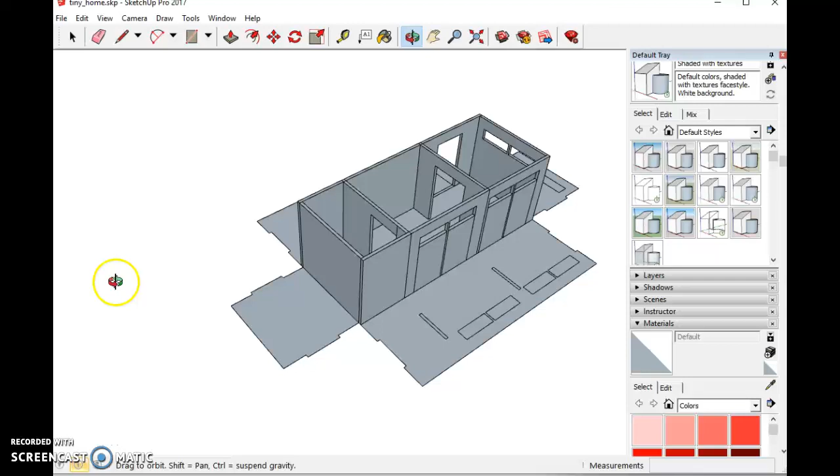Okay, now that we have all the exterior walls drawn - the back wall laid out, side wall laid out, front wall, and the other left side. Front, right, left, back wall.

Now comes the inside walls. There's no easy way to do this besides having to rebuild it again flat. Because basically here we're drawing these - if you're given a sheet of cardboard, a ruler, and a pencil, and asked to draw out the shape of the wall and then cut it, that's what we're doing. We're drawing the shape of the wall on some flat cardboard.

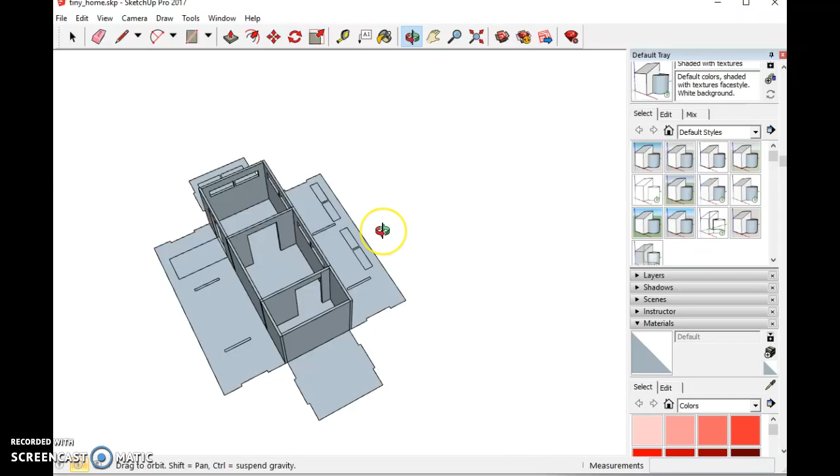What would be the simplest way to explain this? Let's just see what happens here. I'm going to try a step - try to find a camera angle that can see a majority of my lines. The left edge, bottom edge, right, they're all there.

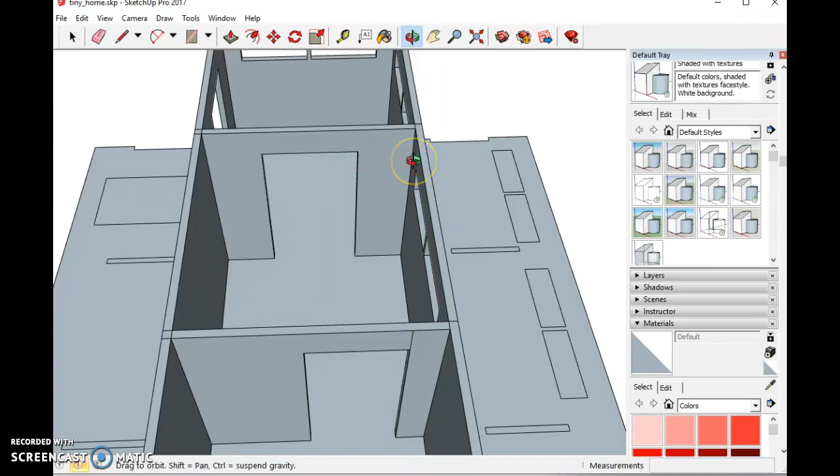I'm just going to kind of pull a tape measure on this. I'm going to go to Tools, Dimensions. So from the corner, this point, I measured that. I'm going to zoom in. If I hover over the line, click and drag, so I have a 2-foot wall. I'm going to click on the point - a 3'6" opening, and a 2-foot wall.

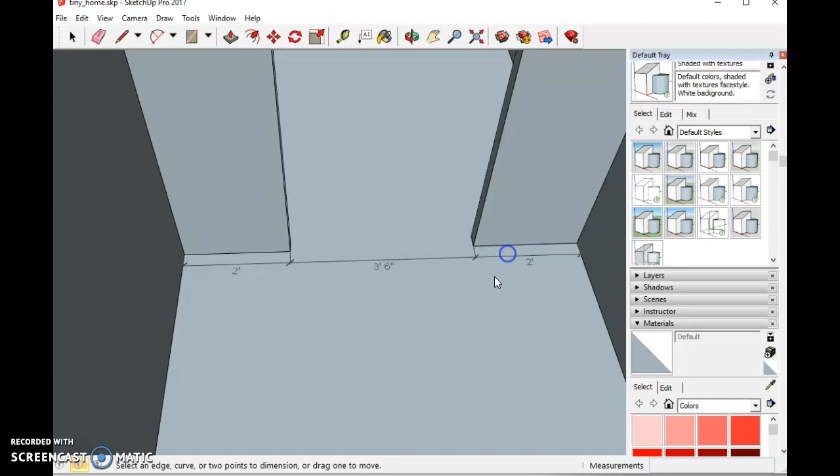Okay, so let's build that. I'm going to build, again, the top view, so I'm going to go to Camera, Standard Views, Top. Well, I know I have a wall that's 7 feet tall and 7.5 feet wide. So I'm going to draw a rectangle that is precisely 7 feet tall, comma 7'6" wide.

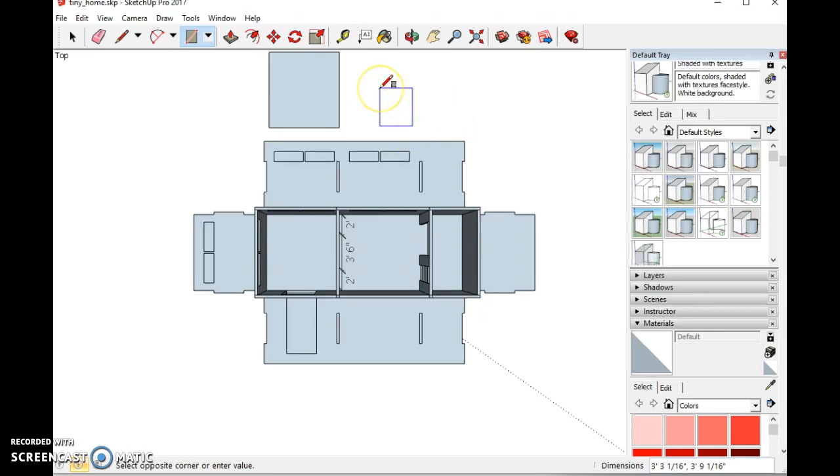And I have two of those - I have this wall plus this wall. You could have more than that, I just happen to have two. So another 7 foot by 7'6".

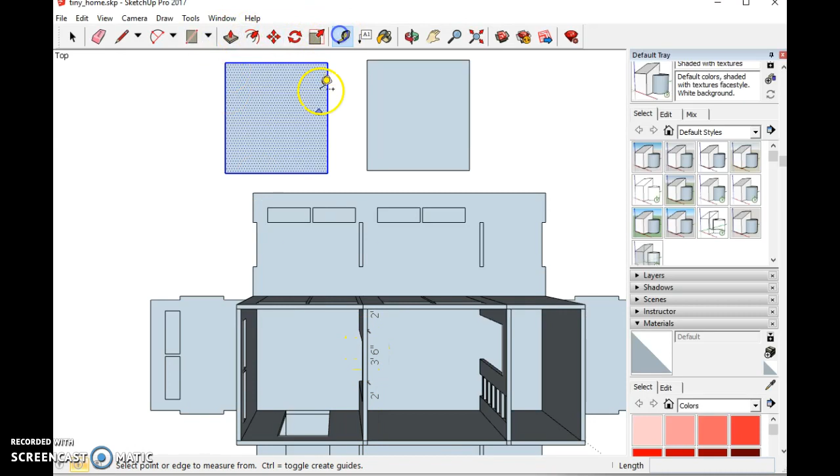Kind of close, I'm gonna move that one a little bit. So let's grab just this wall, just gonna move it a little bit. Okay, so this is my 7'6" wide, because my wall is 7'6" wide. And my measurements say I have a 2-foot space, a 2-foot space, and I know my doors are all the same height - they're all 6 feet tall. So this one's not a bad draw.

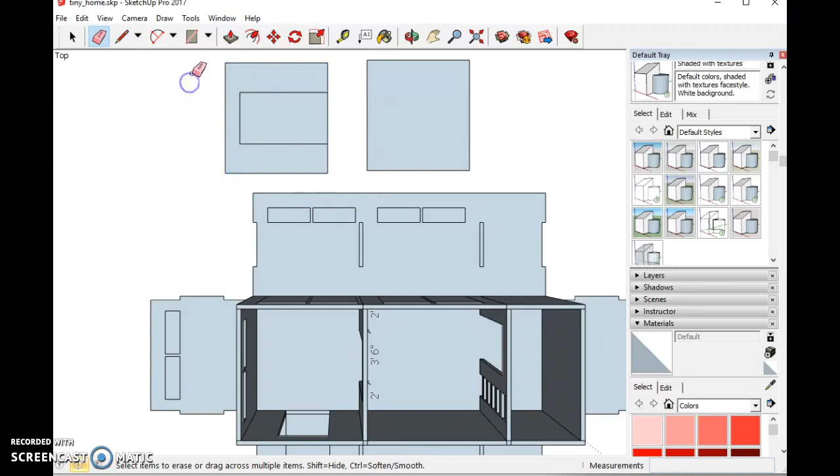It's up, over, and down. Guide lines can go away. And this wall here, check that one out. This ladder I have - you don't have to have a ladder, I just do in mine. So I have a bunk bed up here. This all builds separately in a whole different file.

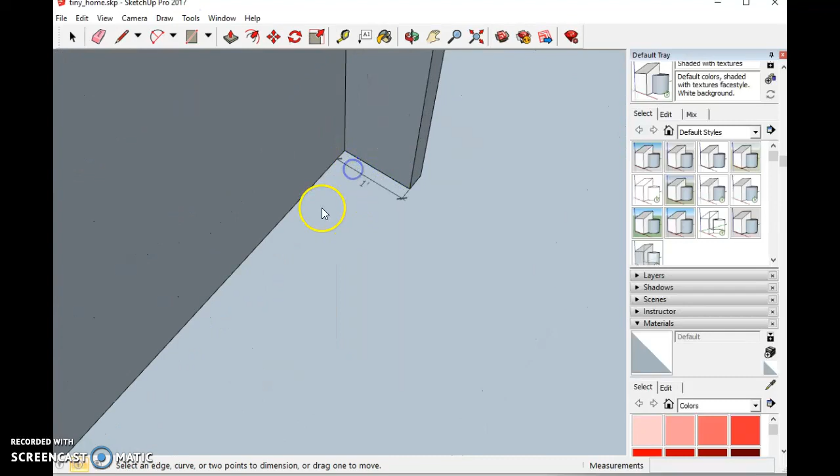So again, Tools, Dimensions. I'm going to zoom in, hover over it, click, drag, 1 foot. Find the endpoint, click, endpoint, click. I got a 3-foot opening. And then math-wise, this is 7'6". This is 4 feet, this has to be 3'6".

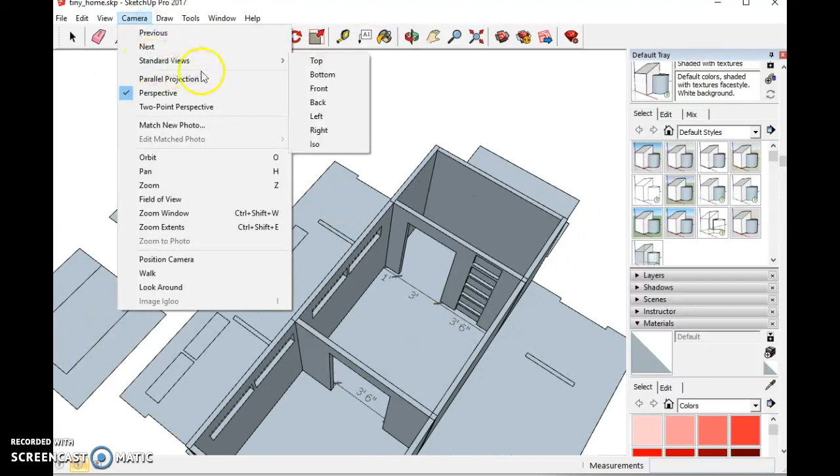Okay, so I'm going to go back to Camera, Standard Views, Top, and then draw this one the same way. I have a 1 foot, and I have a 3-foot door, and they're all 6 feet tall. And draw that one in.

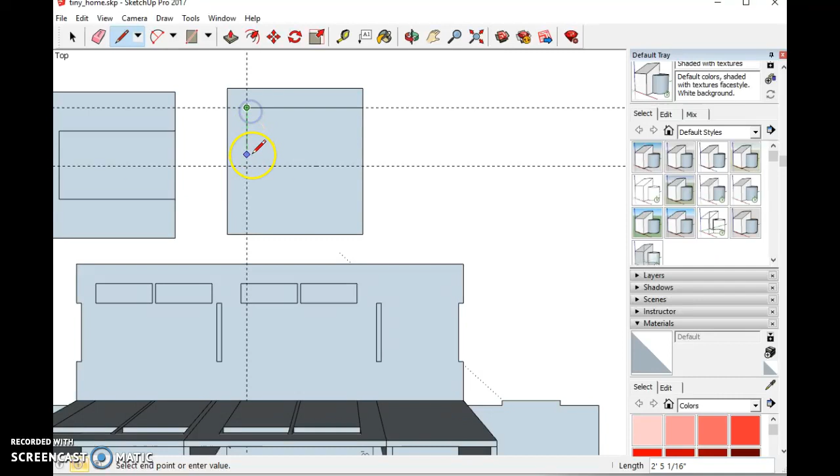And the last step is going to be to kind of clean up some of the lines, these two wall sections here, from inside walls. I won't need this little chunk, it's going to be a doorway, or that chunk, because it's a doorway. So I'm going to walk through that.

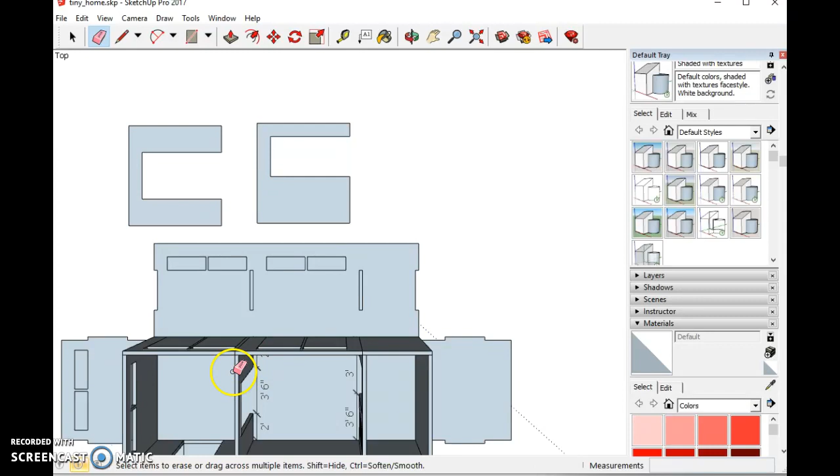And then, earlier I made these channels for these to plug into. I got to build them right now. And then, for simplicity, I made all these the same. I went 2 feet down, 2 feet up, just to make it simple to draw. So I do all these 2 feet down, 2 feet up.

And then our cardboard we're going to use is 3 inches thick, so you got to jump outside 3 inches. These are not lined up, so this 3-inch span is different than this 3-inch span as far as the lines go. That's kind of confusing, isn't it?

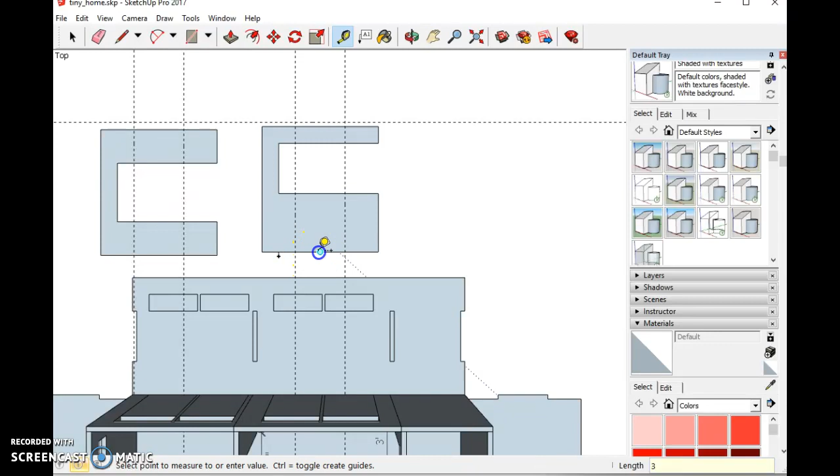Let's do one at a time. So 3 inch, 3 inch. Oh, try it again - there we go, 3 inches. And I'll have a tab go from this point up, over and down. Here too - down, over, and up. Guidelines can go away, and that point can go away.

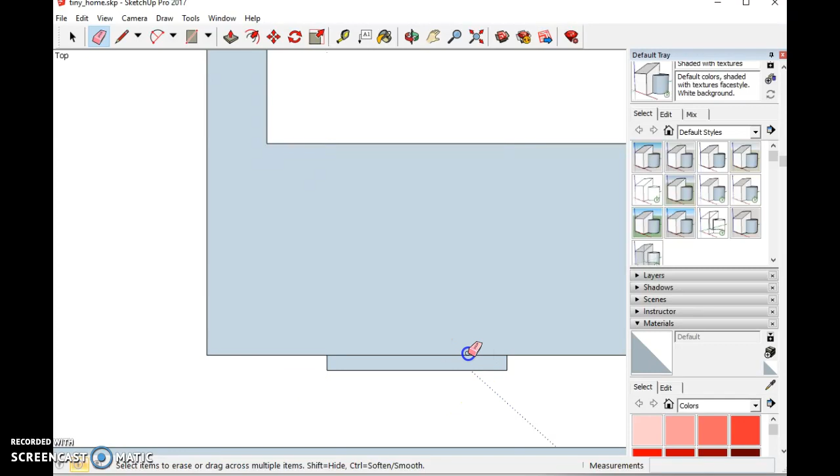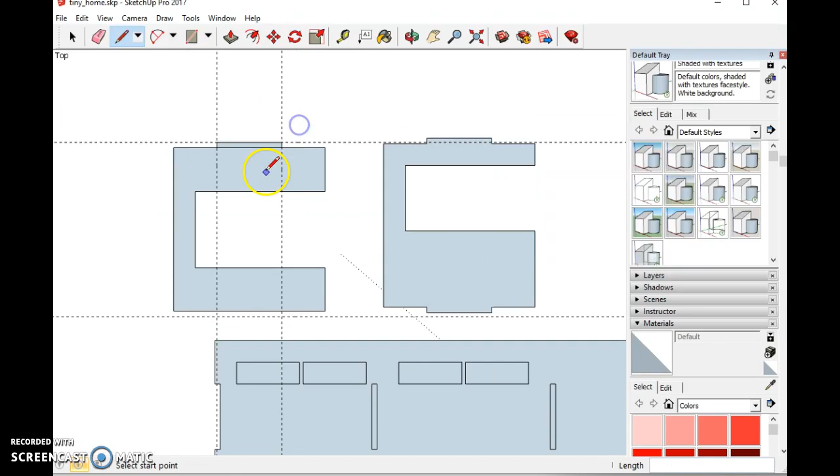Same thing over here, 3-inch, 3-inch. So all your inside walls, they're kind of the same as your outside walls - the difference is you may have a different shape of tab is all. These are the 3-inch tab that'll plug into that 3-inch opening for my exterior walls. The laser cutter is going to cut pretty accurate, so make sure you draw these lines in your walls pretty precise, otherwise it's not going to work so good. So there we have 2 inside walls, 4 outside walls.